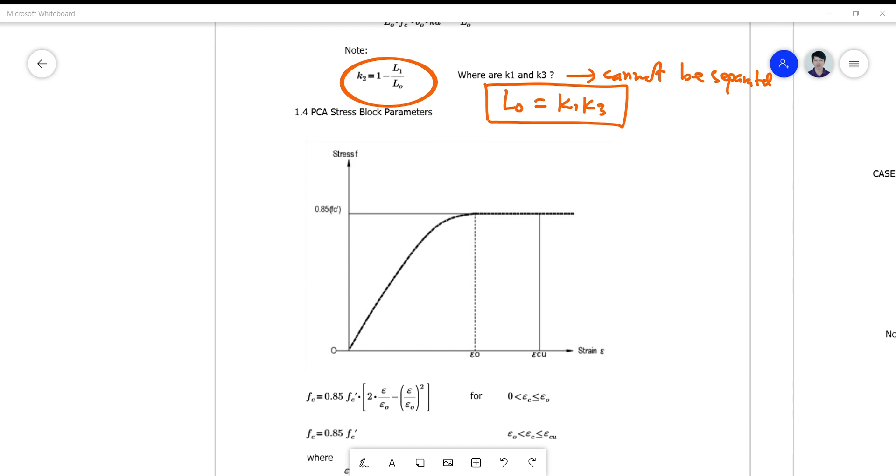Okay? So, this PCA is actually our basis for many formulas concerning the parameters involved - yung ating mga parameters na ginagamit - in terms of the design and analysis of not only flexural members but also other types of members, may it be axial, uniaxial, combination of torsion and bending. So yung mga ginagamit nating parameters, the PCA contributes a lot to it.

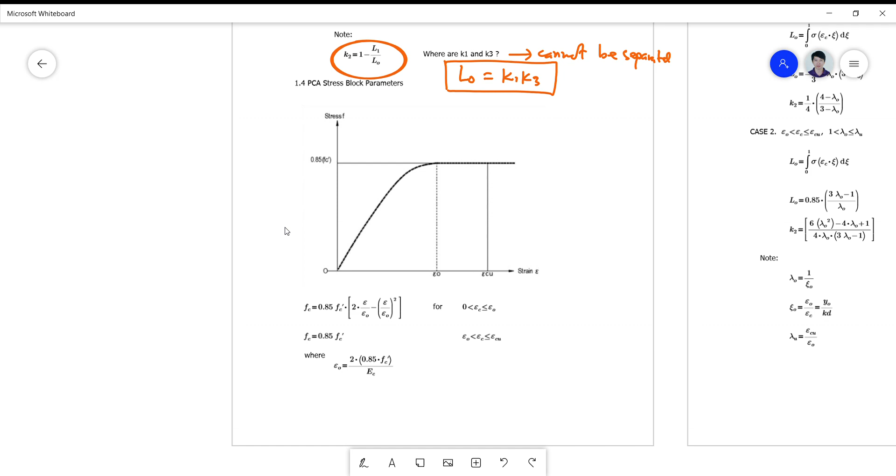Okay, so this is now the figure on what the PCA stress block is giving us in terms of the stress strain property of your concrete. Okay, so we have here, this graph is almost not linear but almost linear at this point, up to about 0.5 or 0.6 maybe, and then the abrupt change in curvature at around 0.8.

Okay, and then at its peak, it is assumed to continue its strain increase without change in the stress. Okay, so this is actually horizontal. Horizontal siya, no? While the Hognestad, dito sila nagkaiba, no? Pababa siya, no?

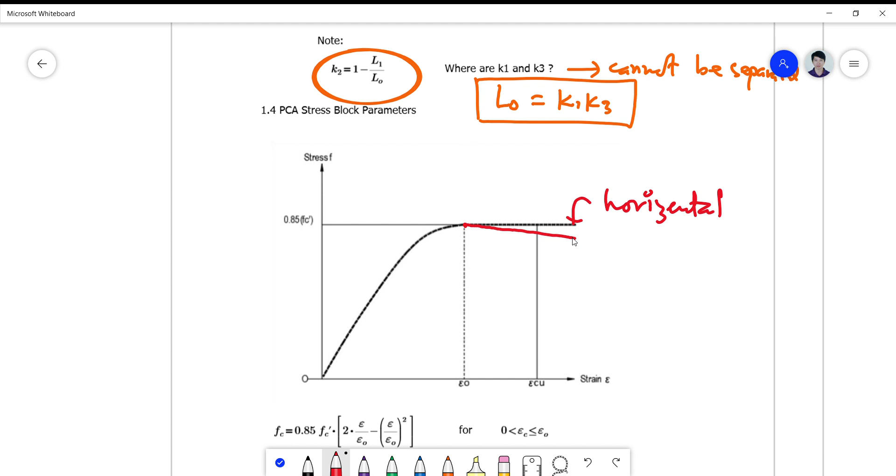So ito yung PCA, ito yung Hognestad model. Okay, so merong konting drop. Okay, we cannot say that the PCA is much more accurate, Hognestad is much more conservative, blah blah, without really looking into the

history of the results obtained from a series of tests where the graph was finally patterned, no? So hindi natin masasabi 'yon unless we are the ones na gumawa dito, eh. Okay?

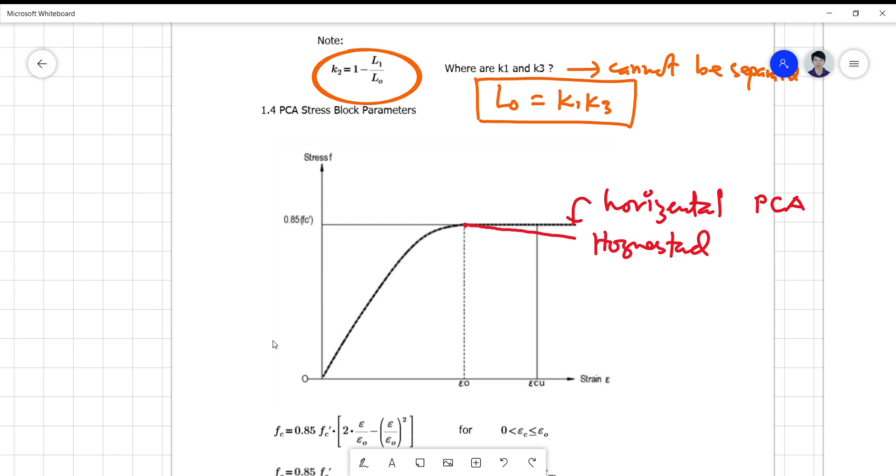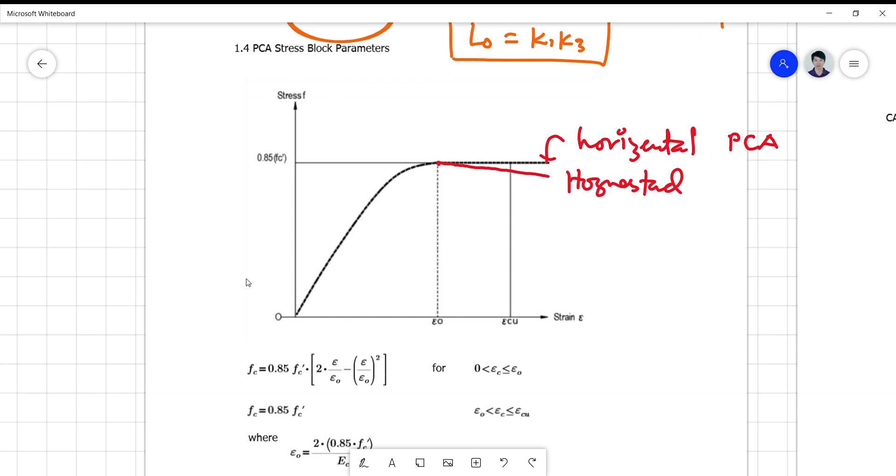Now, what I'd like to present to you in this particular part of the lecture is on how to deal with the moment capacity using the stress block parameters K1, K2, and K3 using the PCA stress block distribution.

Okay, so the PCA stress block distribution defines the curve by separating this graph and this graph here at a point epsilon O, okay, for which your FC at this point, which is I think almost at the elastic range.

So we have here the elastic part, and this is the inelastic part, is defined by these two equations.

Okay, so when epsilon c is in between, let's say epsilon c is in between 0 and epsilon o, then your value of fc is defined by equation 1. Okay, but if your epsilon c is no longer between that and it exceeds epsilon o but less than epsilon u or cu, it will actually fall only at one point there, which is horizontal, which is 0.85 fc prime.

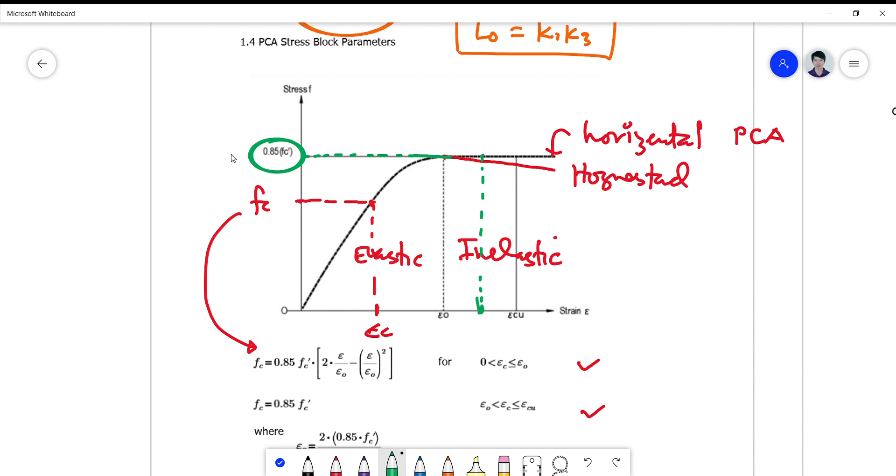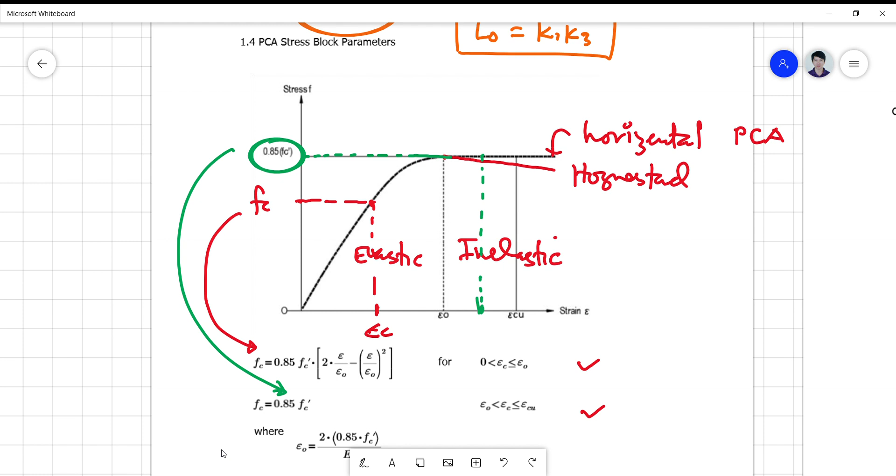Okay, so this is just what the PCA is all about. Okay, simple. Now, the definition for epsilon O

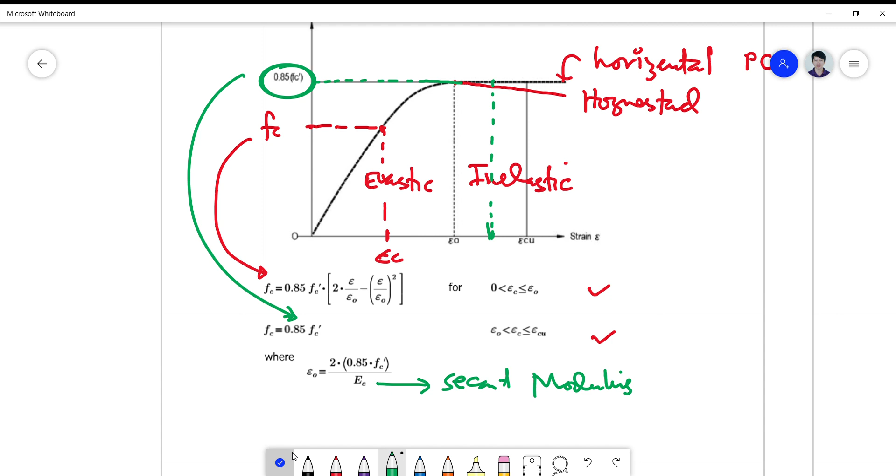on the elastic stage is based on this formula, wherein your stress-strain relation is defined in terms of 2 times 0.85 fc prime over EC, where EC is the secant modulus of elasticity. Okay, so that's 4700 square root of fc prime.

Now for case 1 and case 2, the equation that was derived based on the procedure I presented above is this one. Okay, using the same procedure I used a while ago, your LO will be simply the integral of this one here. So this is sigma, function of epsilon c.

Take note that your Greek letter xi is simply the x that I'm dealing with. So this is just a Greek letter, and this is just the alphabet. Okay? Yung x kasi, ang Greek equivalent niya is this letter x ito sa Greek. No? So this is pronounced as xi.

Okay? I did not change it to x because I want you to be accustomed to using this Greek letter again to show that you are at a different level than the undergraduate class. Okay, so we will be using a lot of Greek letters rather than alphabetic letters. Okay, yung alphabets, iwasan natin. No? So, mas maganda, gamitan natin sila ng Greek letters. Okay? Now, for LO, if I will integrate this, I will arrive with this.

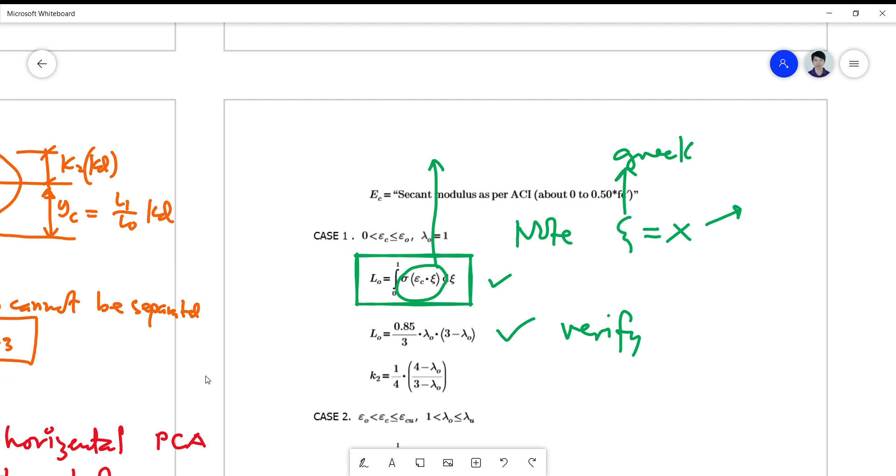Okay, you ought to verify. You try to integrate it, this one here. Okay, what function are you going to use here? You use the function on case 1. Okay, what's the function? Okay, so case 1, ito yan. FC is 0.85 FC prime. So, i-substitute mo siya dito.

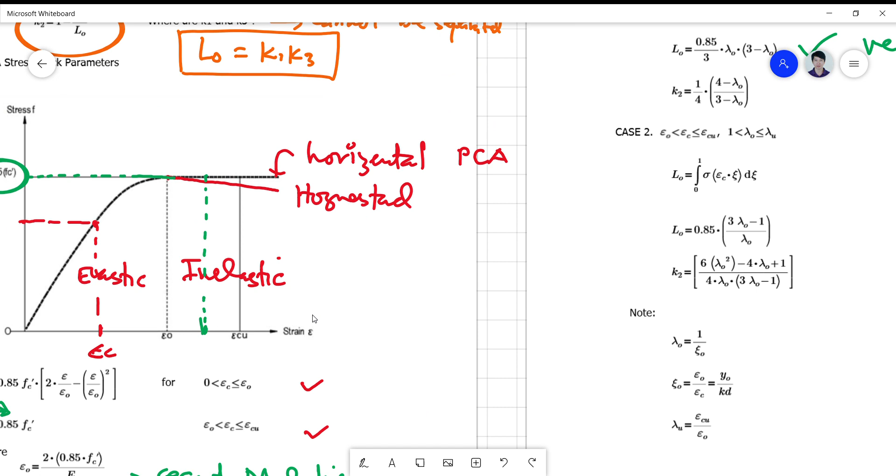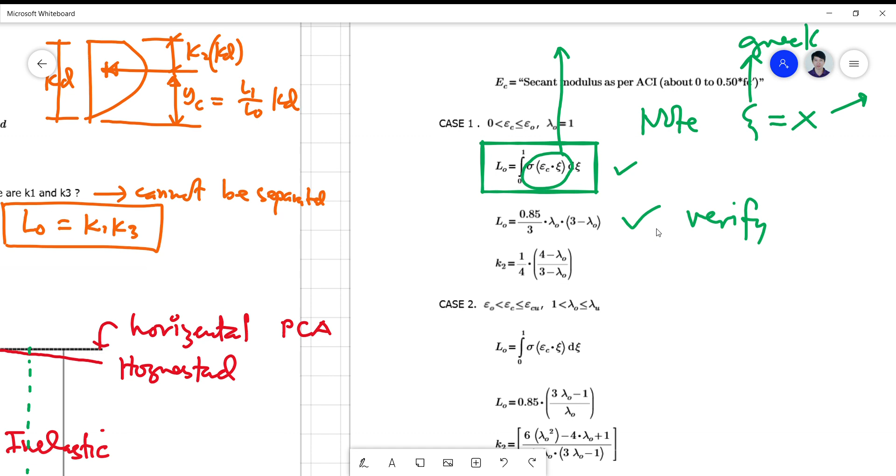Dito, and then makukuha mo ito. Of course, lambda will not appear just like that because lambda is defined at the bottom here. Kailangan substitute mo pa ito, no?

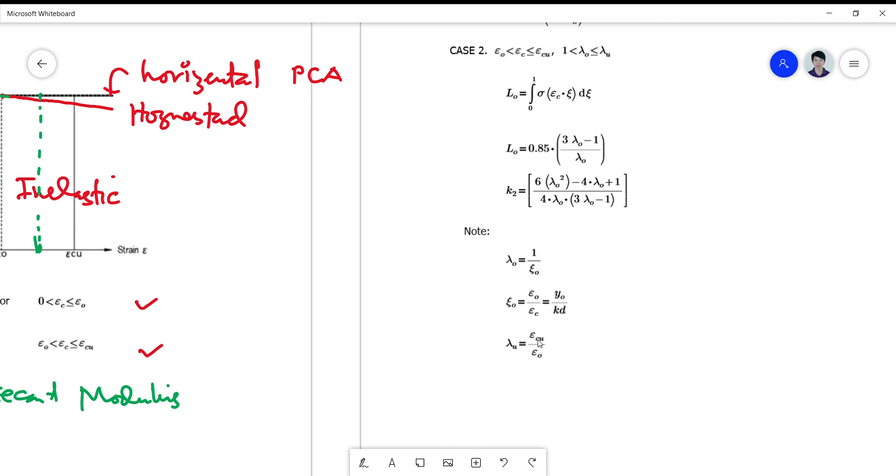So, lambda is in terms of xi of O, lambda of O, and lambda of U is in terms of epsilon CU, ultimate. Just like this, lambda O is the reciprocal of the transformation variable xi of O, and this is the reciprocal of the transformation variable at the ultimate stage, which is epsilon CU. So something like that.

So you have to verify this by integration.

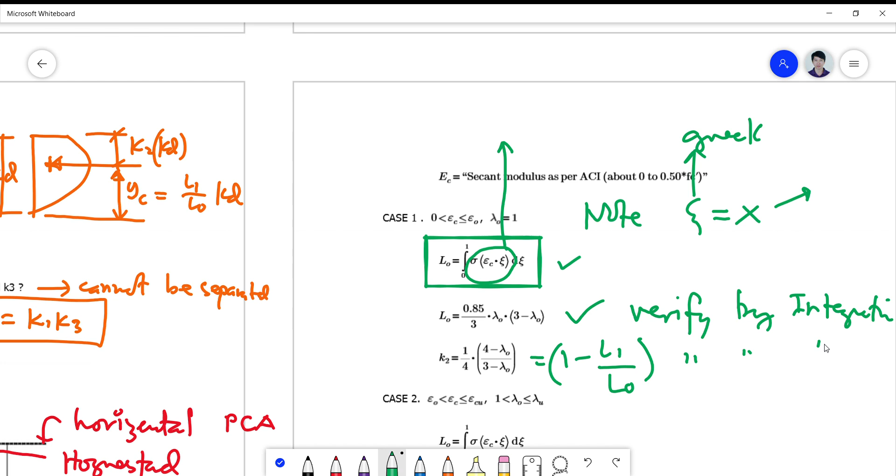And you also can get K2. Again, what is K2? This is 1 minus L1 over LO. Okay, you can verify again by integration. So may answer na siya, di ba? So in case 2, ganun din.

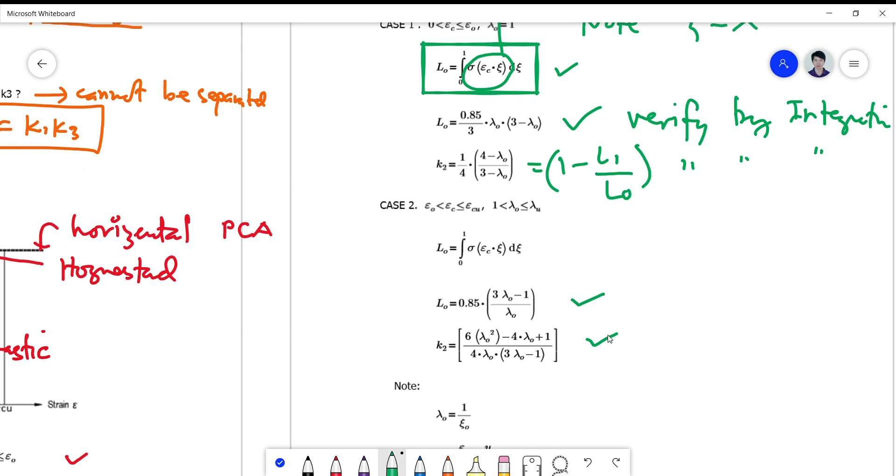This is verified. This must be verified. So lambda O is 1 over xi of O rather, and where xi of O is simply epsilon O over epsilon C, or simply your YO over KD.

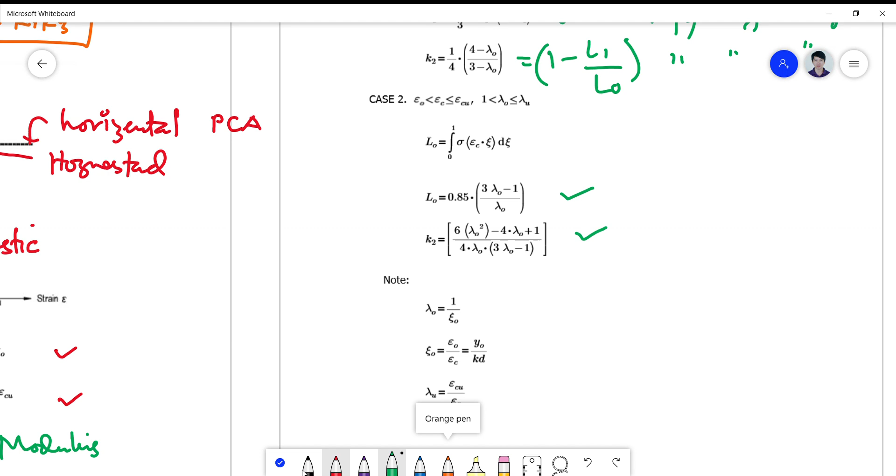So what is your YO? YO is the distance from the neutral axis to the fiber at the point wherein the stress is starting to have a value of 0.85 FC prime. Kasi dito mababa pa siya. So nandito siya, sakto dito, no?

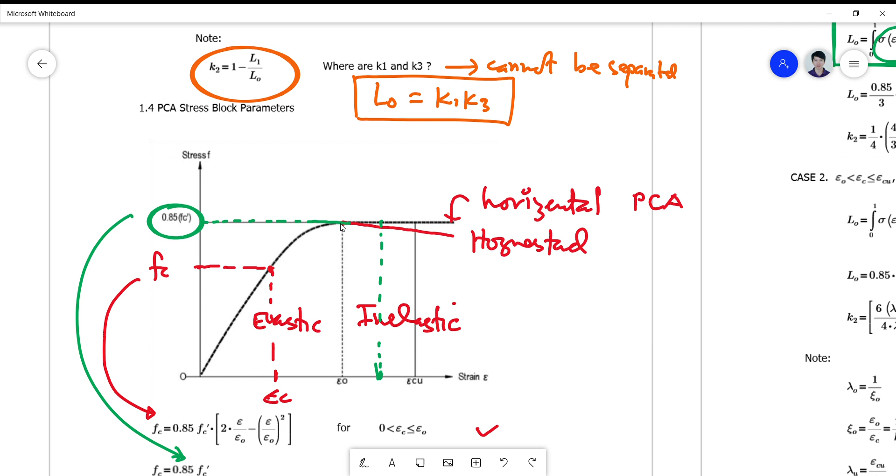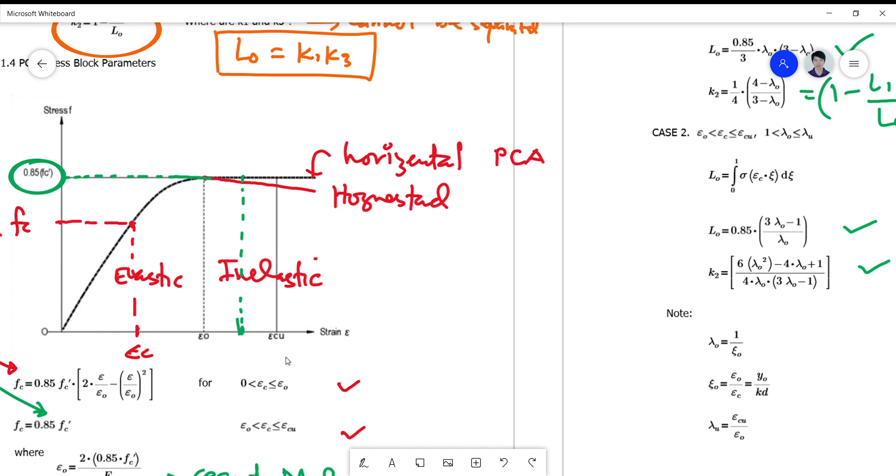So you have to verify or get what YO is using again this formula. Because you know epsilon O, given FC prime and EC, you can easily get your epsilon O here.

Okay, so using this formula here.

So you can get epsilon O. You have a value here. So you can iterate from here and then you get this value.

So at exactly epsilon O here, what is your xi O if this is equal to that? So what will be your YO? YO is simply KD value, okay? So KD value there.

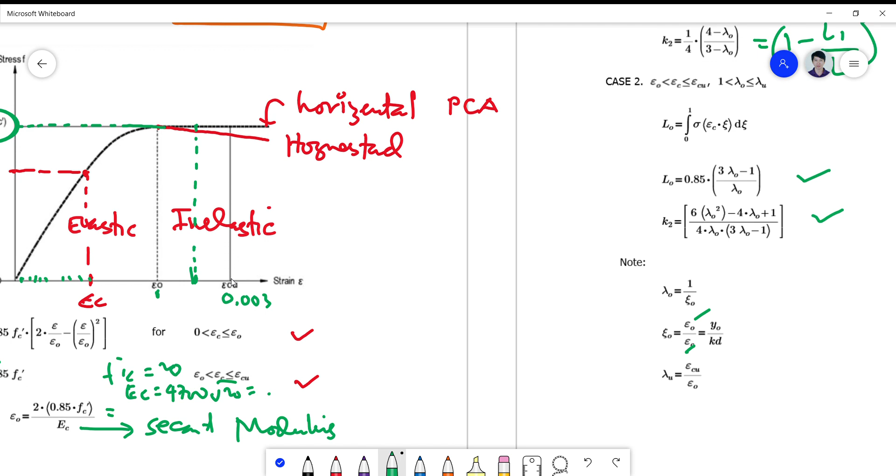So you just get, you now get your values on the basis of assuming your iteration starts from 0 up to epsilon CU, which is the final. So this is how to deal with it using iteration.

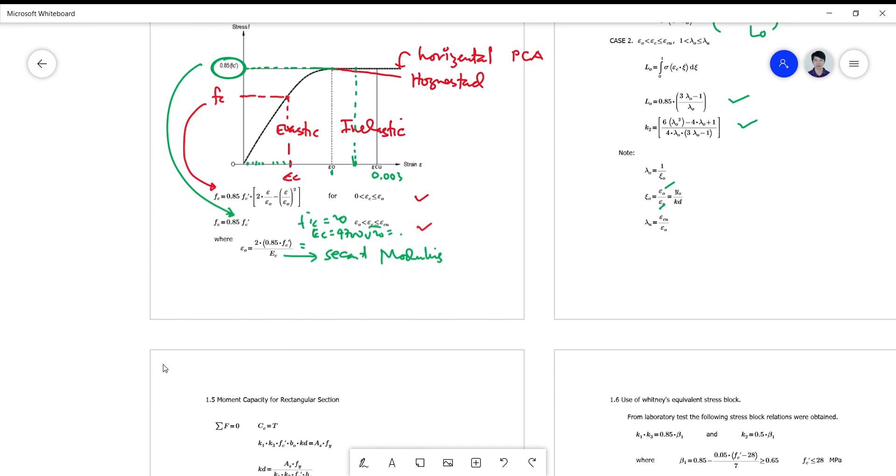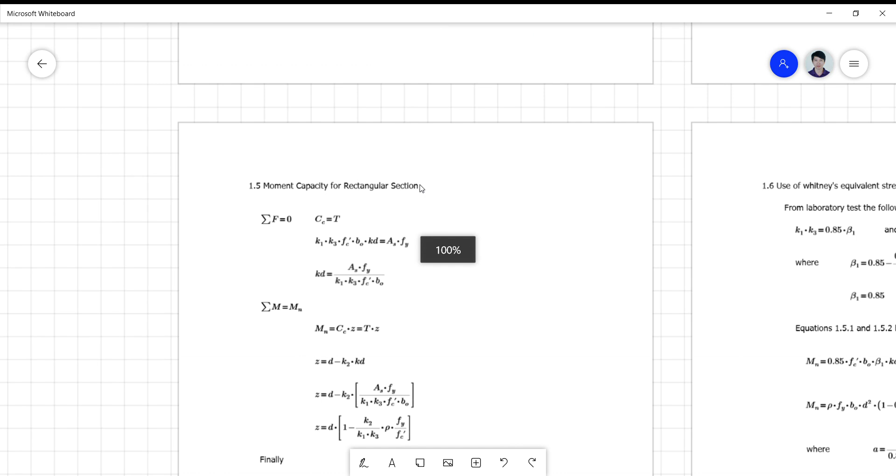Okay, so let's move to moment capacity. For a rectangular section, what happens with your formula? We know that our formula for rectangular section is simply equilibrium, or sorry, your neutral axis is simply defined on the basis of equilibrium condition.

So this is CC. What is this? This is LO. LO FC prime B O KD is equal to AS FY. So you can get KD. Okay, so this is your KD.

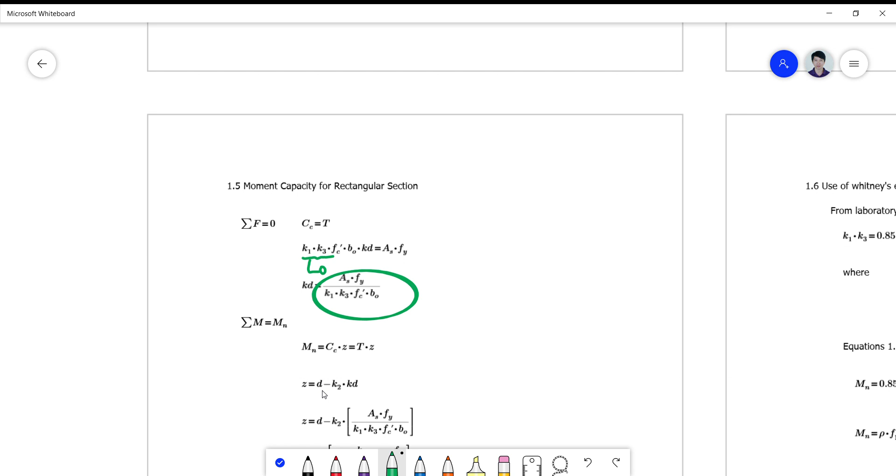And if I get your moment is CCZ or TZ, I now get Z equals D minus K2 KD. I will now get D minus K2, I insert KD there. So I...

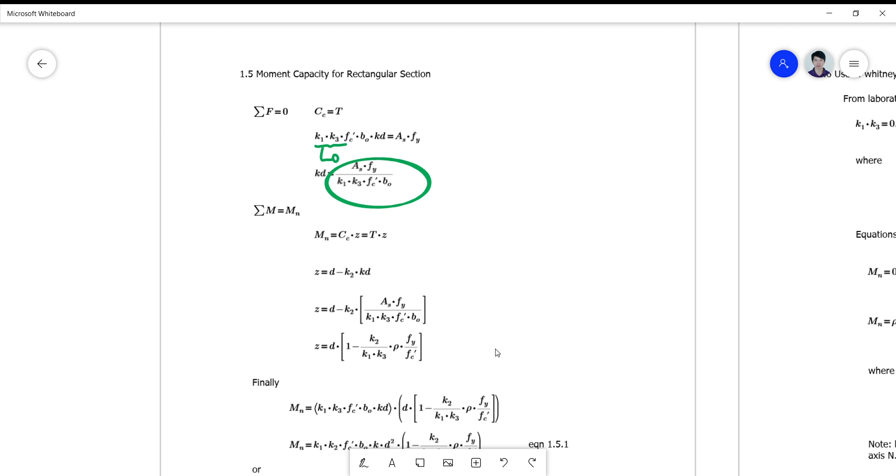Factor out D. So my value for Z now becomes D, 1 minus this value here.

Okay, so paano ka nakapag-factor ng D dito? Eh wala ka naman D doon. Ha? So how can you do that? Can you factor out something that is not present in the expression?

Anybody? I think, sir, ay, yes, sir. Yung AS is equal to rho BD.

Rexter, no? Wait, sir. Possible pala, sir. Pero magkakaroon po ng denominator na D. Okay, so it's possible by multiplying it with D, okay?

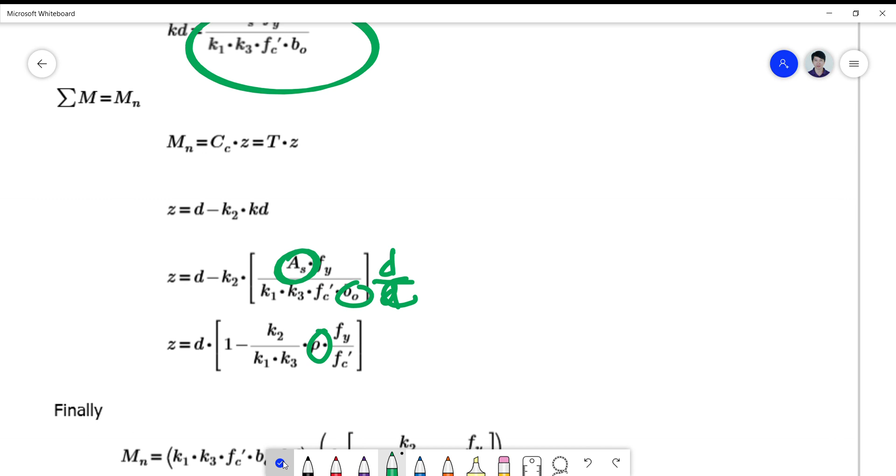Okay, so I will no longer elaborate on that. It's just para hindi lang kayo mainip. Kaya ako tinanong yan, okay?

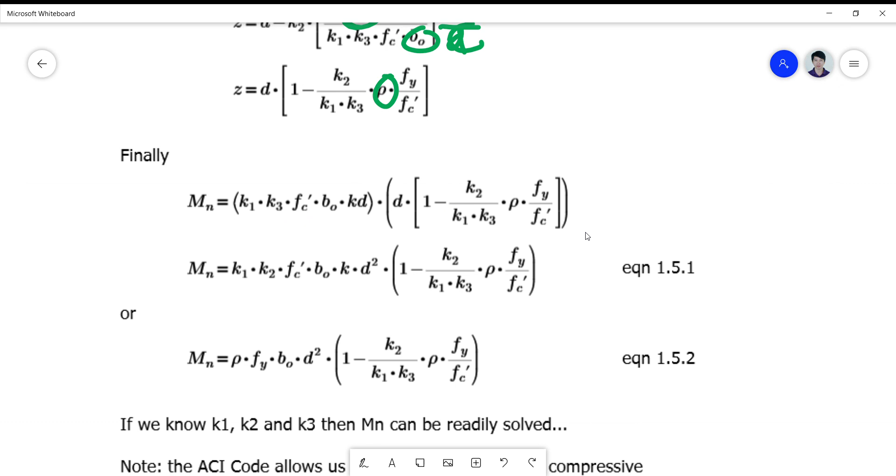Okay, so Mn now is K1, etc., blah blah blah. So these two equations here on top, equations 1.5.1 and 1.5.2 here, sana yun?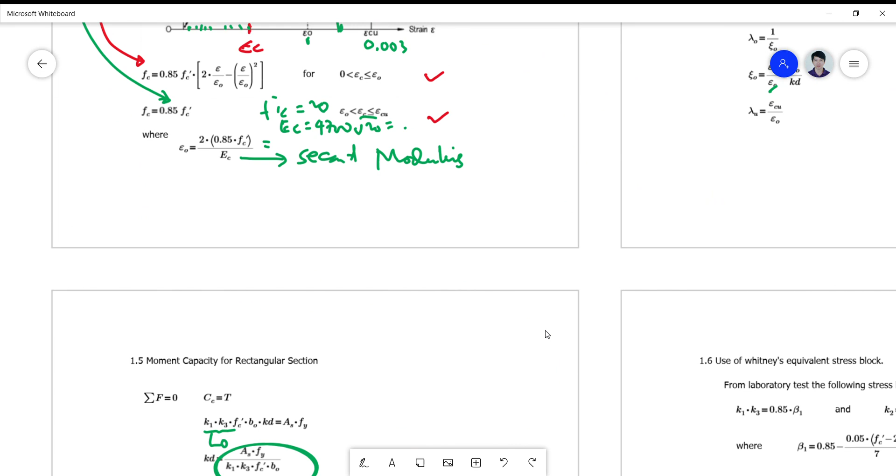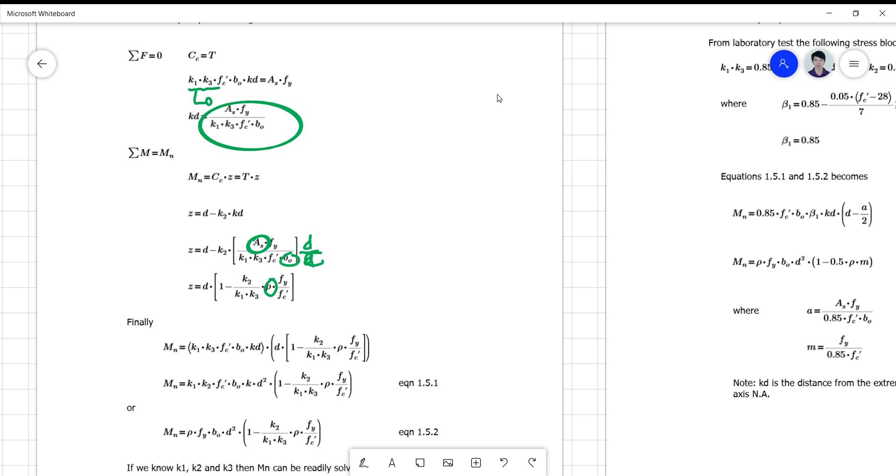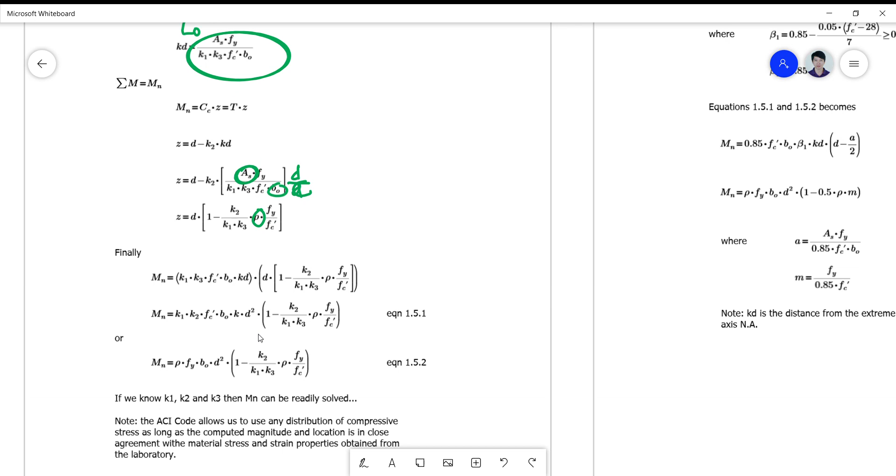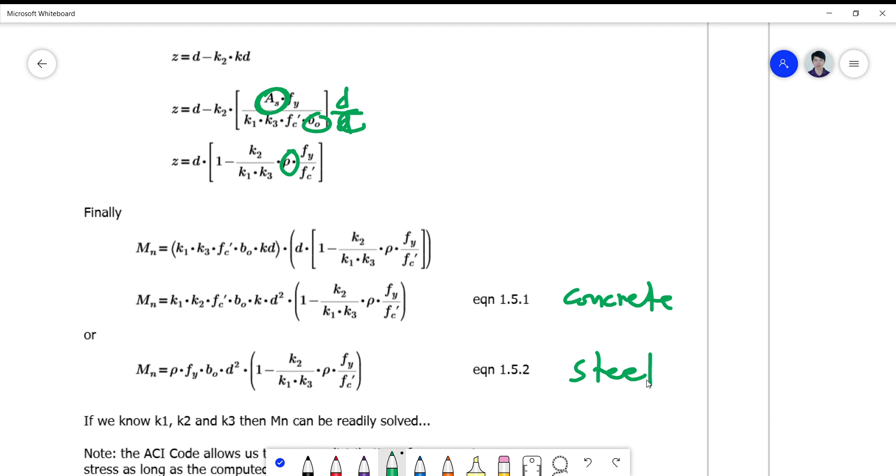One point 5.1 and 1.5.2. Okay, so these equations here are identical, no? They are just the same. Kaya lang, ang kamukha nito is yung concrete part, okay, concrete part to yung steel. So this is your Mn equals Cc z, and Mn equals Tz.

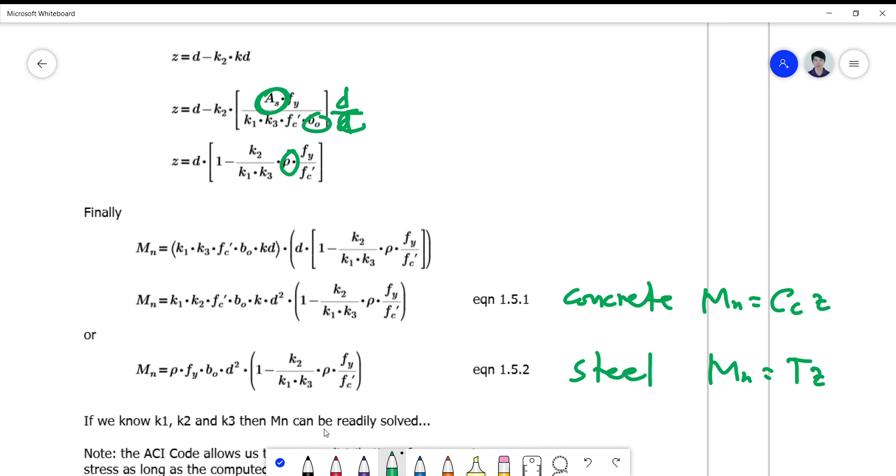So if we know K1, K2, K3, then Mn can readily be solved. Note that ACI code allows us to use any distribution of the compressive stress as long as the computed magnitude and location is in close agreement with the material stress and strain properties. Remember this one, class, no? Close agreement.

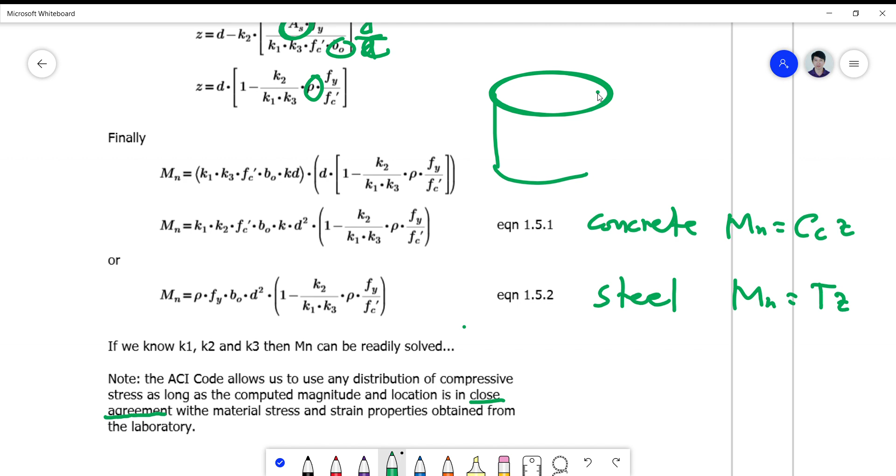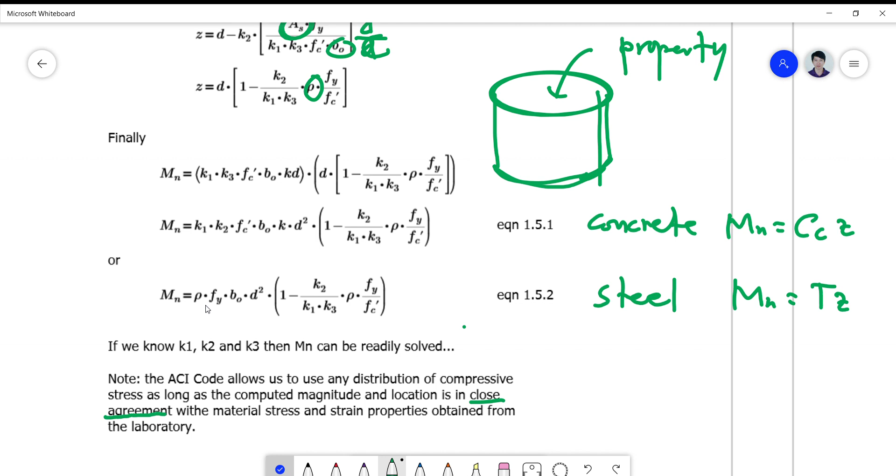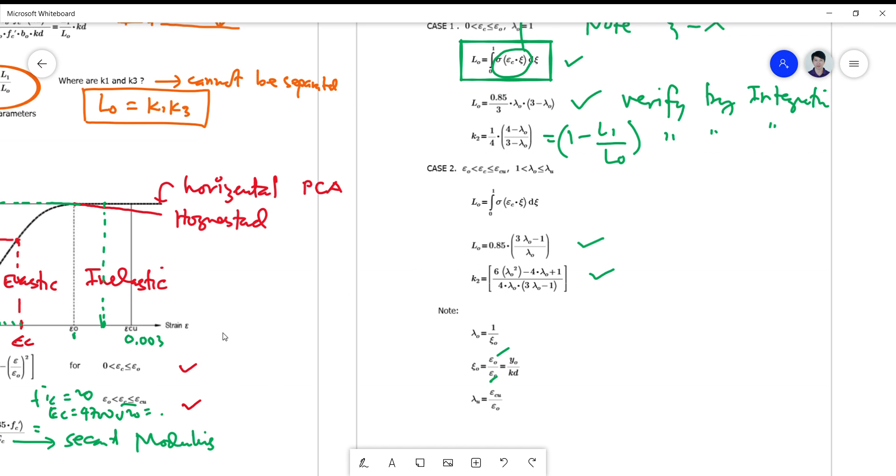So when you have a material, let's say a cylinder which has a different property, you can come up with test analysis or laboratory experiments that will yield your K1, K2, and K3. Ang mapapalitan nun, yung stress block parameters mo. So you're no longer using the stress block parameter of Whitney and so on. If you're using a PCA model, you are using this model here. So you're just like using the test result of PCA. If you're using Hognestad, you're just using the test data of Hognestad.

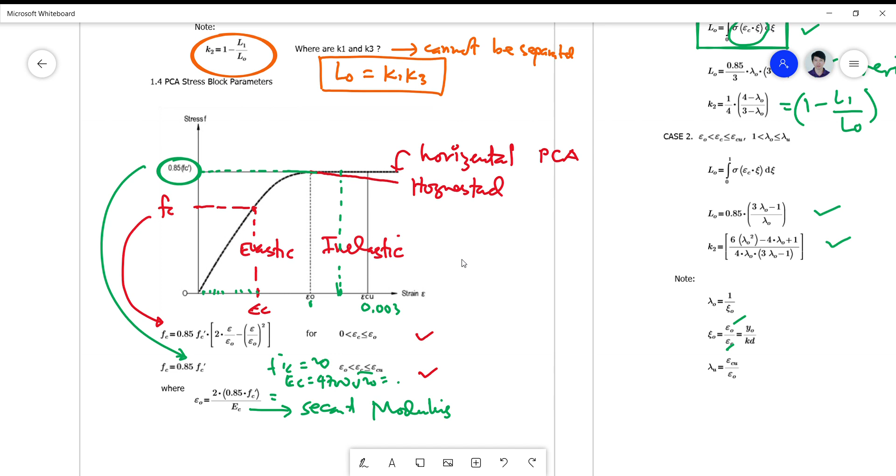So if you have a different material property, you can no longer use this because this has some limitations on the basis of what the property was used. In fact, may mga test tayo na pag hinaluan mo na ng ibang material, nagkakaroon ng ibang result yung formula mo. No? Maybe your beta 1 cannot reach a value of 0.85, or can actually be lower than 0.65. So something like that. Okay, so be careful when you're using equations. You must go and refer to whatever history it was taken from.

Dahil tayo ginagamit naman natin equation ni Whitney, parameter tayo, so yun yung susundin natin. Normal aggregate concrete, light aggregate concrete. So meron tayong limitation doon sa aggregate size, meron tayong limitation sa mixture, meron tayong limitation sa type of cement, meron tayong limitation sa water cement ratio. So all the properties involved in mixing a normal aggregate concrete or a lightweight aggregate concrete must be followed, or else

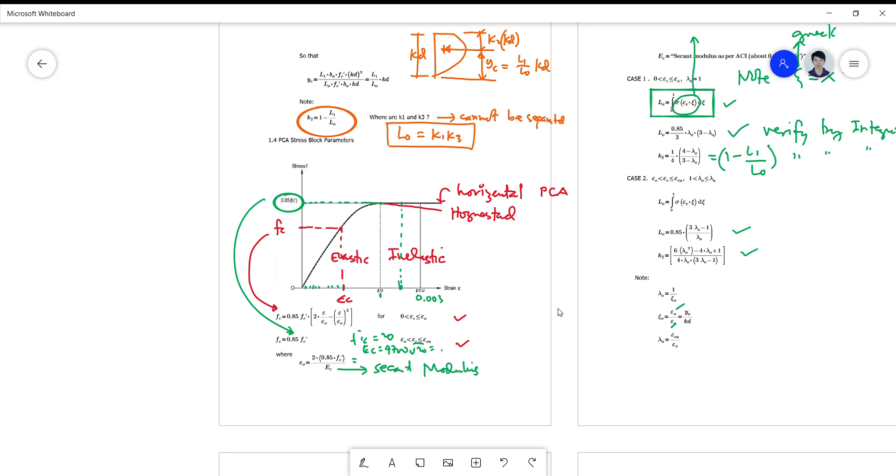Wala, hindi ka, parang ano lang yan yung COVID, ano na yung gamot na inaano nila ngayon sa COVID, ivermectin ba yon? So okay, so kung hindi mo naman nabasa yung history ng pagkakagawa ng gamot at sinabi na ng doktor na hindi kulang pa yung test, nasa sayo na kung susubukan mo, no? Diba? So scientific basis must be always present whenever you are trying to analyze something on the basis of science.

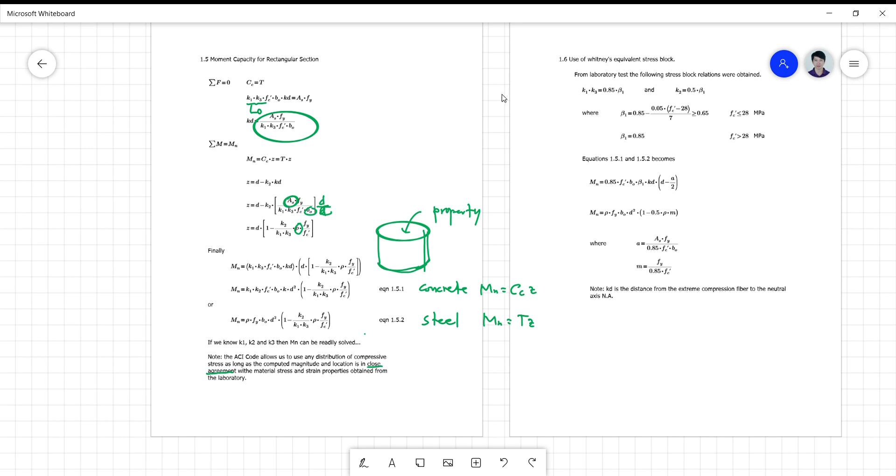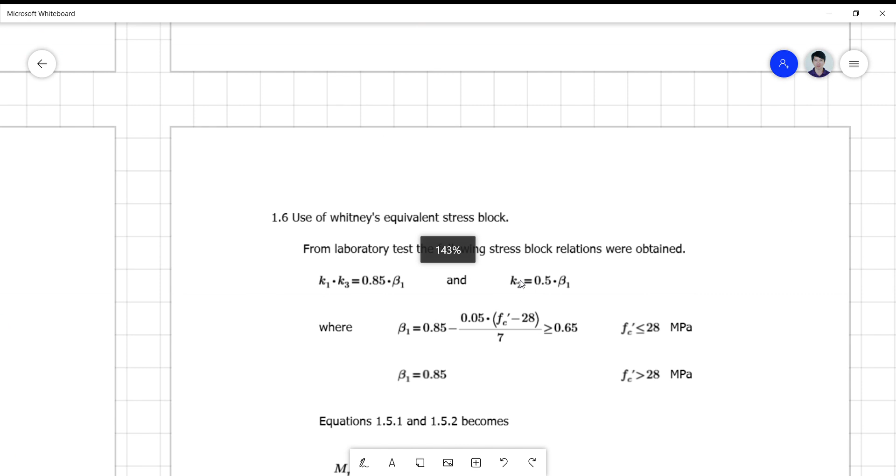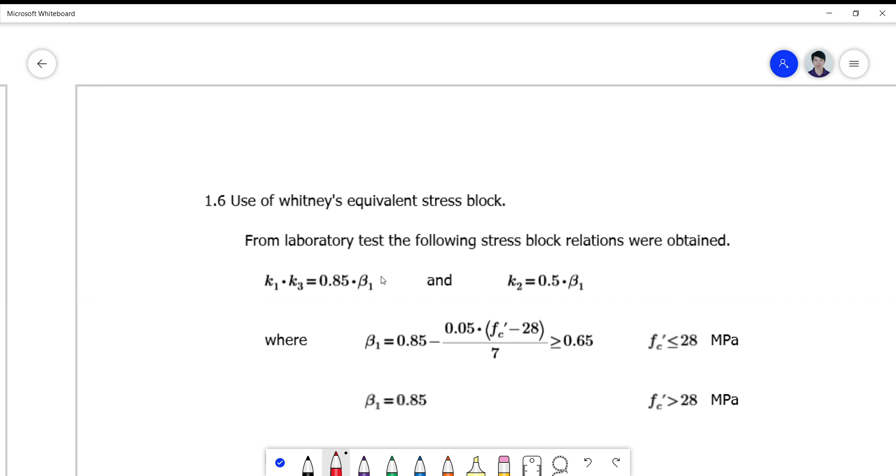Close agreement, close agreement. That's the key word there. So let's go back to Whitney's block. From the laboratory test, the following stress block relations were obtained. Okay, so Whitney's experiment, to summarize it all, simply concluded that K1, K3, or simply LO, this is LO, is 0.85 beta 1.

And K2 is simply 1/2 of beta 1. Where beta 1 is, this is the model, okay, based on the model he used in experiment. He found out that beta 1 is within this range when FC prime is less than or equal to 28, and it cannot be less than 0.65. So it must always be greater or equal to 0.65. And beta 1 is parang baligtad dito.

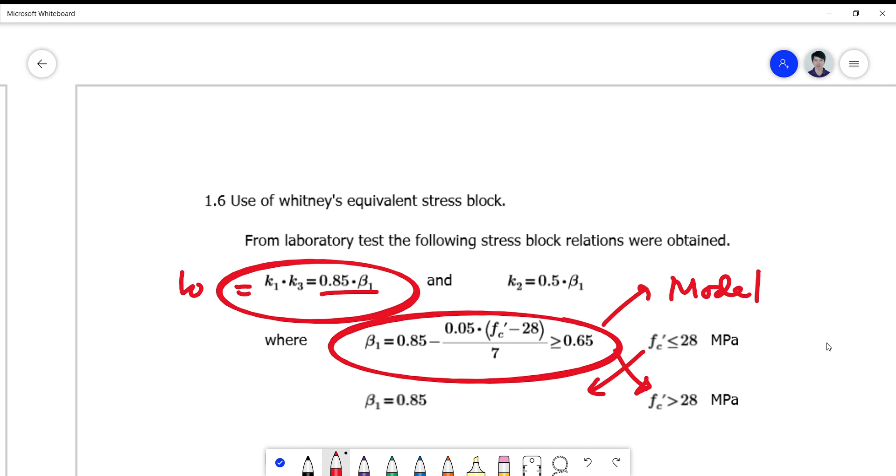So sorry class, no? So this formula is for FC prime greater than 28 megapascal, and for FC prime less than or equal to 28 megapascal, it is 0.85. So I'm sorry for the error. Okay, the equations 1.5.1 and 1.5.2 can now be simplified on the basis of Whitney's parameter.

So pag ginamit na natin yung Whitney dun sa ating dinerive na formula, okay, ito na yon. So this is 0.85 FC prime, BO, beta 1 KD, simply your A, di ba? So ito yung 0.85 F prime C AB. Parang ganyan lang siya, di ba?

A, where A is equal to beta 1C. Your C is actually your KD, no? I'm not using the letter C because C sometimes is conflicted with the variable compressive force. Okay, and this is for your steel, this is for concrete, and this is for steel. So for the concrete part, this is your CCZ and this is your TZ.

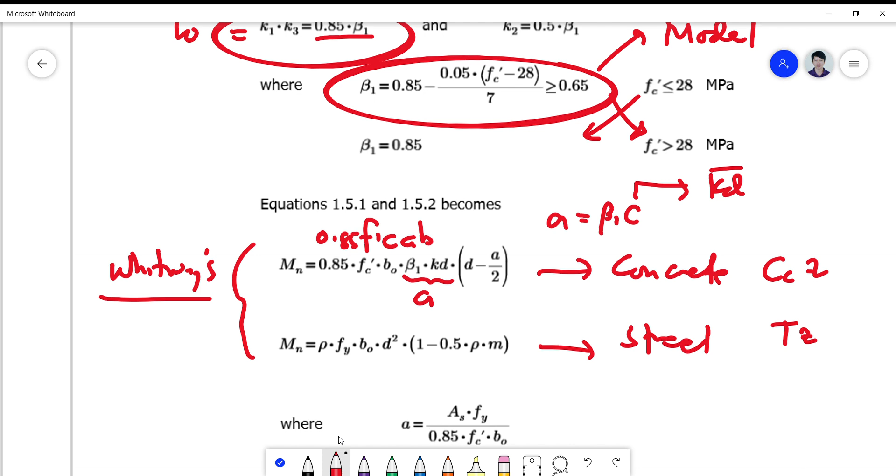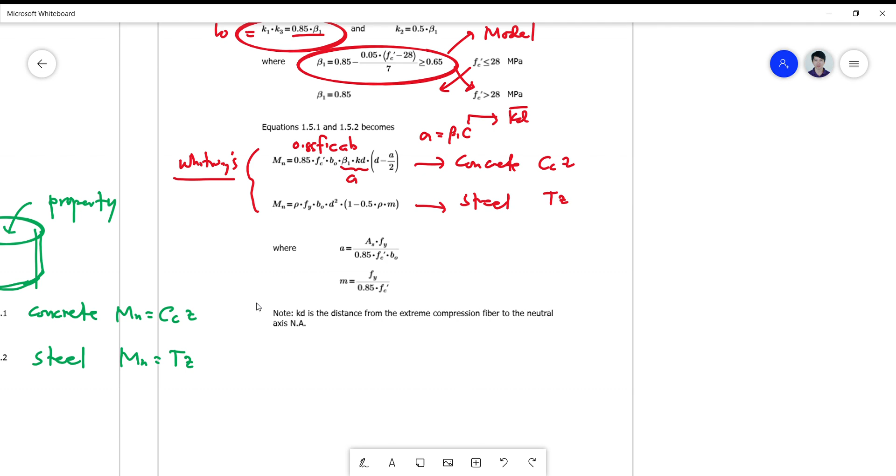Okay, so rho FYBOD squared, 1 minus 0.5 rho M, where A is equal to ASFY over 0.85 FC prime BO, and M is Fy over 0.85 FC prime. Note that KD is the distance from the extreme compression fiber to the neutral axis NA.

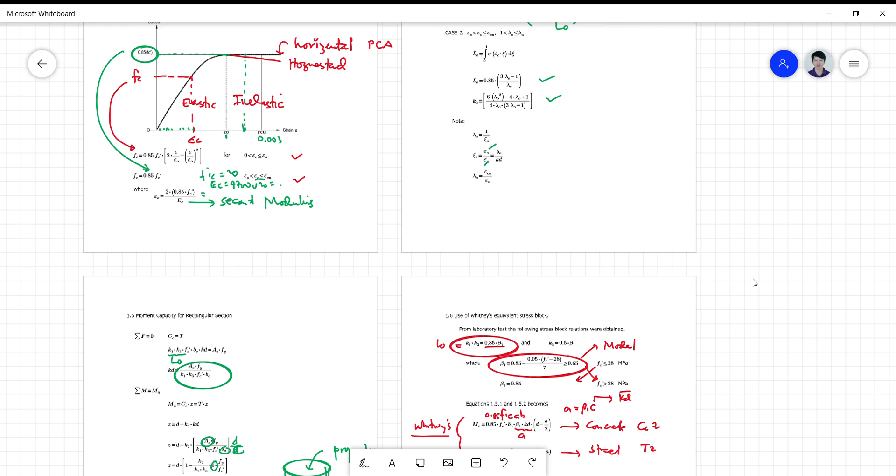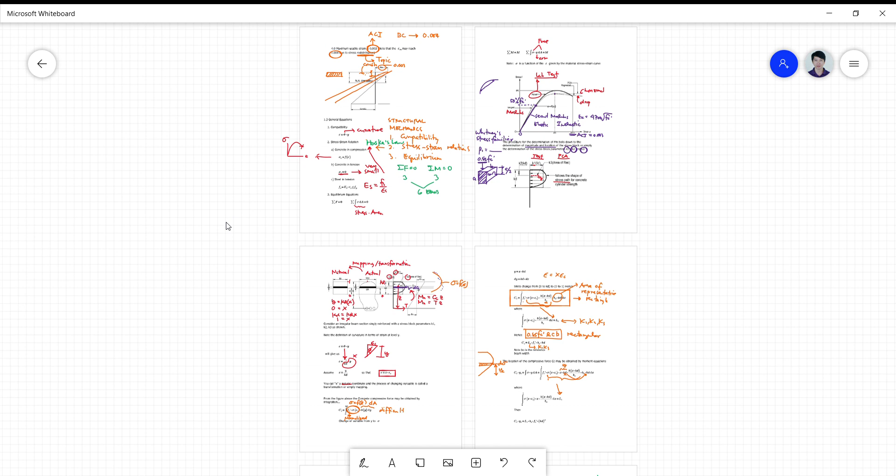Okay, so that ends your flexural concept. It's as easy as understanding 10 slides or 10 pages na pinag-aralan natin, halos ilang chapter yan sa libro. Ito lang ibig niya sabihin. So if you're talking of double reinforced beam, T-beam, L-beam, hollow beam, triangular beam, lahat ng beams kasama na dyan. Ganyan-ganyan din ang analysis niya. Okay, so that is my first lecture on flexural members. So if you have questions, we can